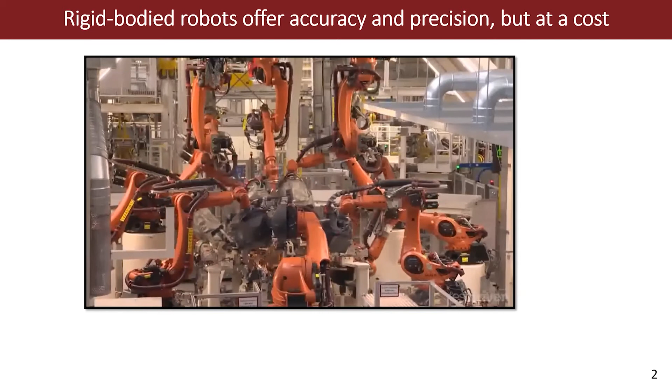So to start, I think I'll start with why should we care about soft robots? The type of robots that most people are most familiar with are rigid robots. They're made of stiff links and have strong and heavy motors. These types of robots are fast, accurate, precise, and have large force outputs, which is exactly what we want for industrial tasks like making cars.

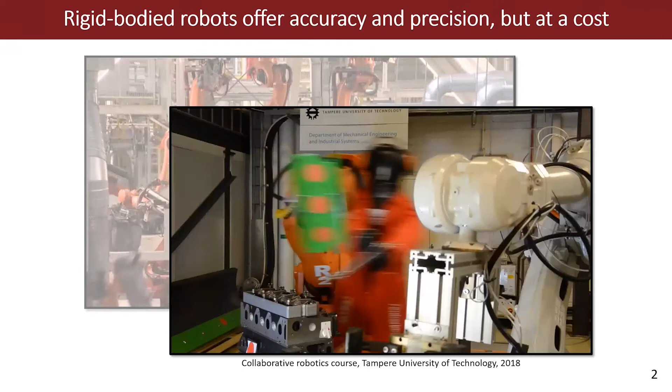But these same robots, if they perform the wrong behavior in the presence of humans, have the potential to cause serious injury or even death. As you can see from this simulation with the dummy, in real industrial settings, usually we keep robots and humans physically separated so that they don't interact at all.

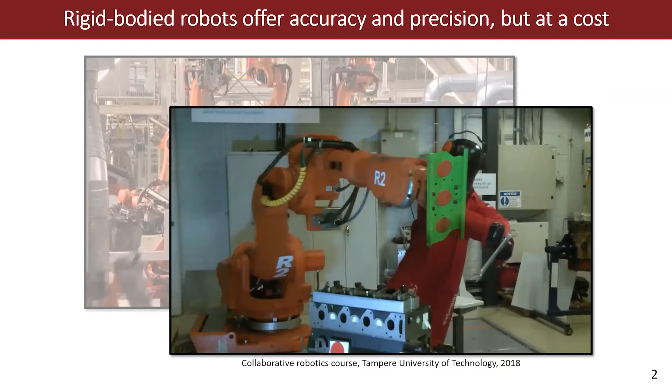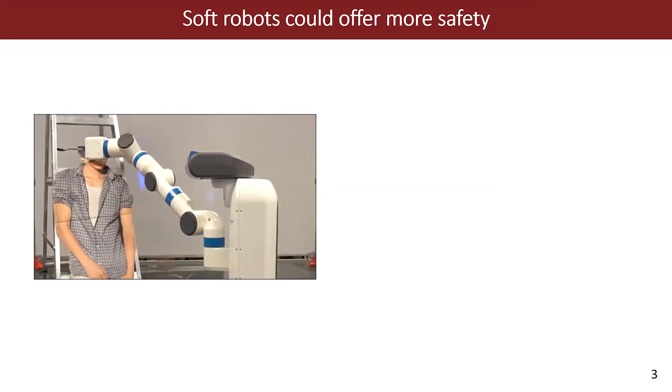But for robots to become more useful in our day-to-day lives, we need them to be able to safely interact with humans, because many of the tasks that we do on a day-to-day basis involve physical contact with humans. So take, for example, the task of feeding, where again if I have a rigid-bodied robot, it's not back drivable, and if it has the wrong behavior, it has the potential to cause injury.

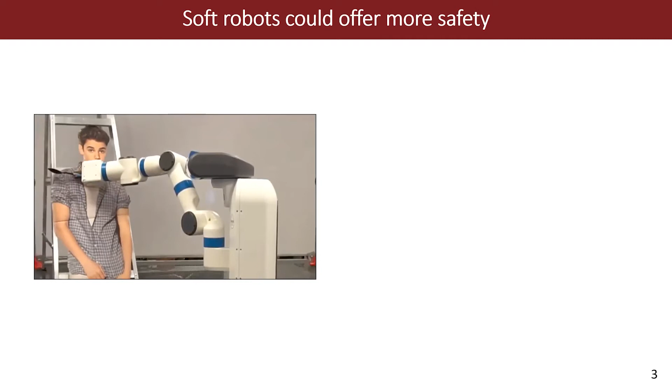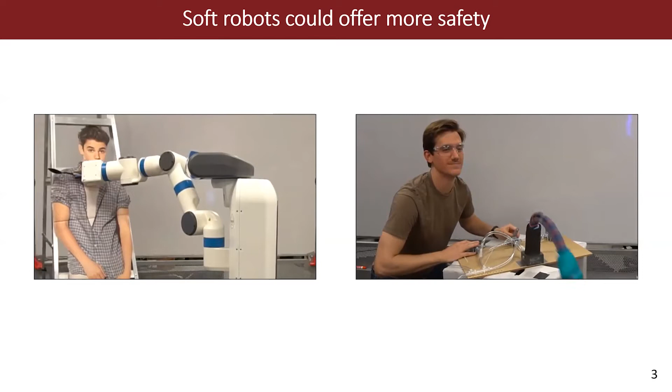So if we instead build our robots out of soft materials with inherent compliance, we can build systems that, even in the event of complete failure in terms of control, still offer some sort of inherent safety in interacting with humans. And so that's one of the main benefits of soft robotics, but it really only scratches the surface.

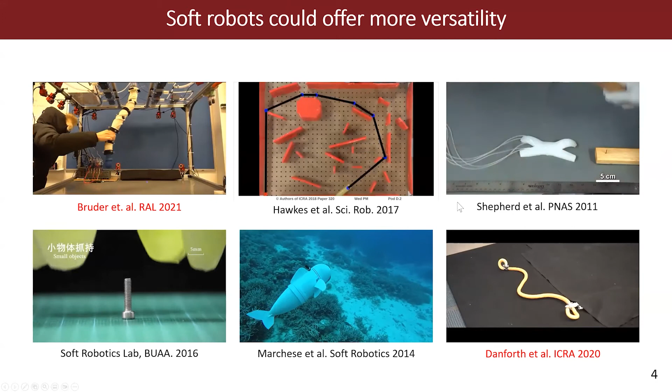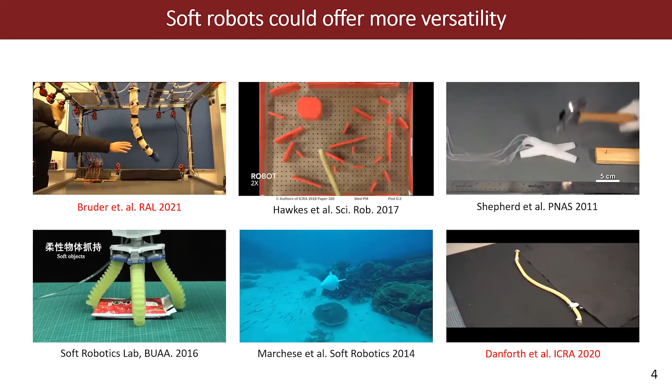In addition to being able to safely interact with humans, soft robots can also do things that would be really difficult to achieve with rigid-bodied robots, such as navigating through their environment through contact, by being able to absorb impacts without taking damage. They can conform their shape to grasp objects of various shapes and sizes without any sort of sophisticated control. And they can much better emulate the types of motions and morphologies that we see in natural systems like fish and snakes.

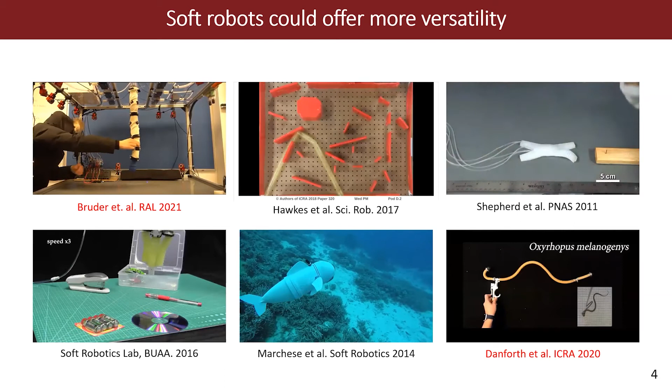So given all of these potential benefits, the overall goal of my research is to try to actualize soft robots that can safely perform real-world tasks, especially those in which safety and adaptability are just as important or more important than precision. Some examples of those types of tasks are assisting the elderly with things like feeding, bathing, getting dressed.

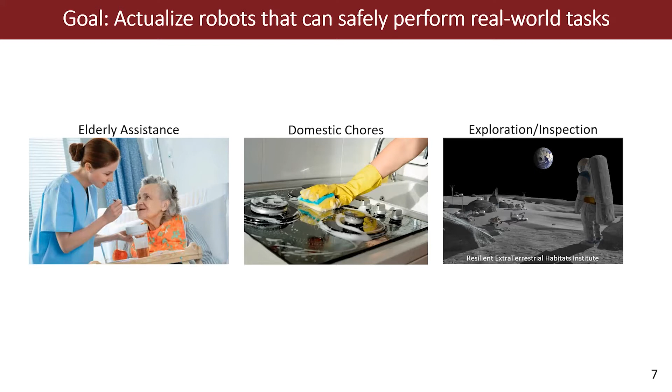It's a class of tasks where you need to be gentle just as much as you need to be precise. Domestic chores involve interacting in unstructured human environments and interacting with humans, as well as all sorts of different objects and geometries. And then even in exploration and inspection tasks, it's really nice to have robots that are able to adapt to unstructured and unpredictable terrain. So even in that domain, soft robots, I think, could be useful.

And so the approach that I take to trying to get soft robots towards these real world tasks is modeling, design, and control. So I focus on all three, and specifically the questions that I'm trying to answer are: in design, how do we build robots that are physically capable of performing these types of tasks? In modeling, the question is, how do we describe the robot behavior in useful ways that will allow us to actually control the robots and get them to perform the tasks that we want them to perform?

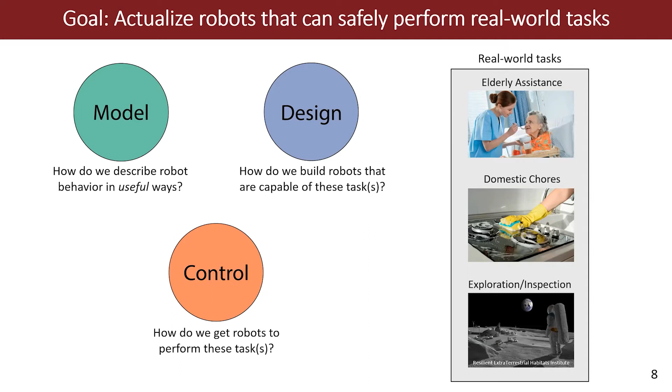So that's the overall goal, and these are the subdomains within. I try to take an integrated approach to modeling, design, and control, considering all three at once.

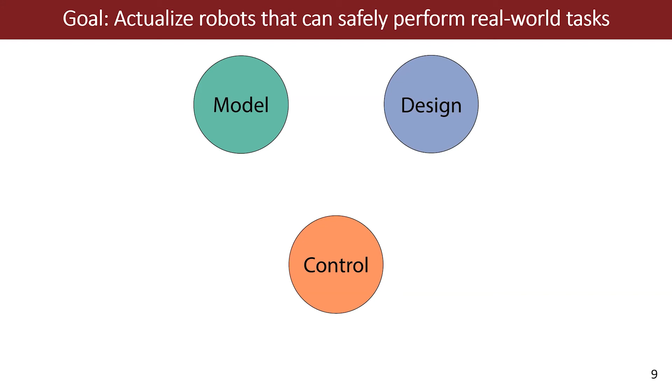In my past work, one approach I took was to develop a design-oriented, physics-based modeling approach for soft robots. This type of approach lets you consider many different soft robot designs before you actually construct them, and gives a principled way to do steady state control of soft robotic systems. But in order to build a physics-based model, you tend to have to make a lot of simplifying assumptions, so this modeling approach isn't useful for doing dynamical control of soft robotic systems.

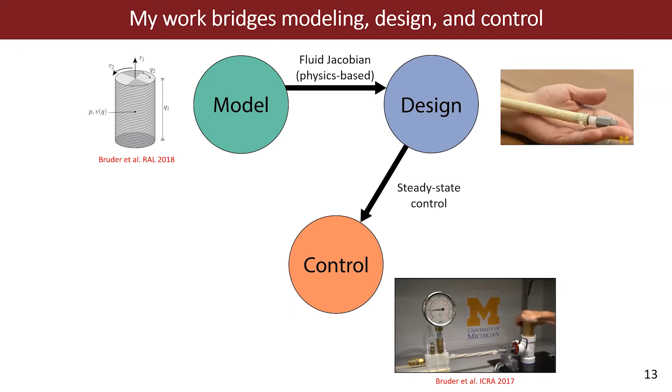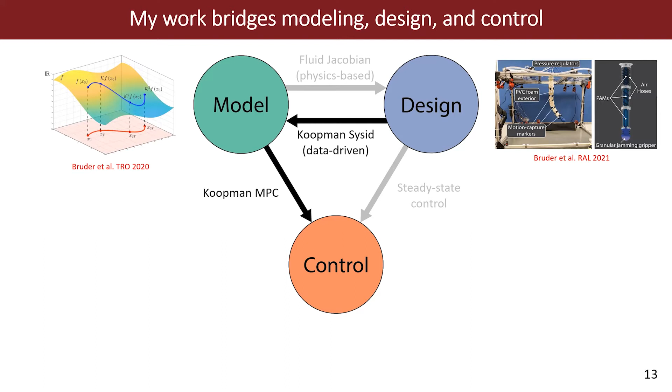So I'm not going to talk about this physics-based approach at all today. Instead, I'm going to talk about a second approach I developed, which is a control-oriented approach that's data-driven. This lets us take a real soft robotic system and learn a representation of its dynamics as a linear representation. With that linear representation of the robot's dynamics, we can apply linear optimal control algorithms to control these robots beyond the previous state of the art. So this is what I'll talk about today: this Koopman-based data-driven approach for soft robots and how it enables new behaviors we couldn't achieve before.

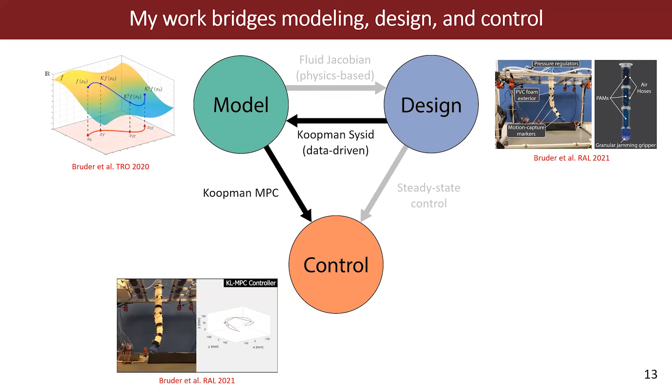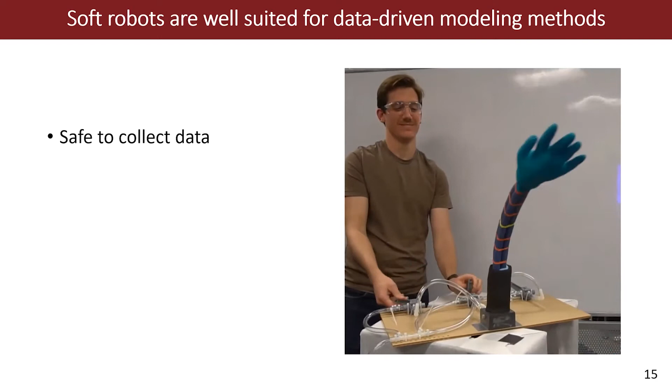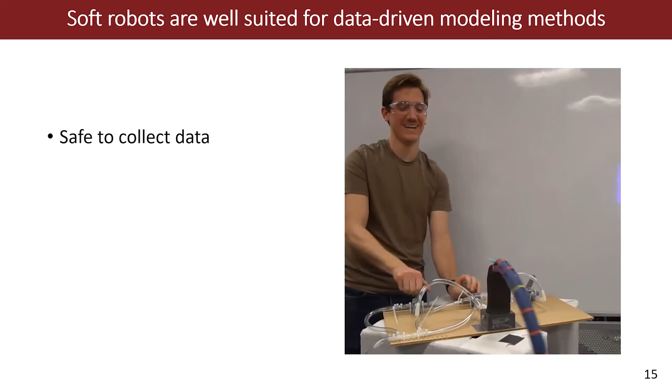So the first question might be, why is it a good idea to take a data-driven approach to modeling soft robots? It turns out soft robots are particularly amenable to data-driven methods for a few reasons. One, compared to rigid-bodied robots, it's really safe to collect data from them because, like in this video, I can command my robot under pretty much random control inputs and not worry about it damaging itself or its surroundings.

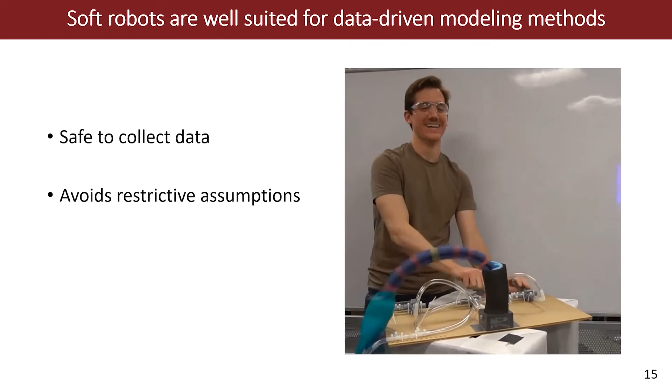The second reason is that by building models from data rather than from physics, we can avoid making the type of restrictive assumptions we typically have to make to keep those models tractable. Along with that comes the ability to account for fabrication defects explicitly in our models, which tend to play a pretty large role in these handmade soft robotic systems.

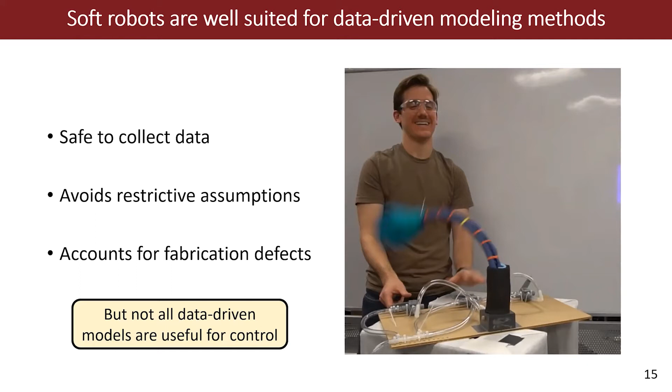But I said before that I'm trying to build a control-oriented modeling approach, and not all data-driven models will actually be useful for control. So we have to take a more particular approach to this. When I say a model is control-oriented, what do I mean? Well, in my mind, there are two things I really want in a model to help me do control.

The first, as with pretty much any model, is that I want it to accurately predict the behavior of my real system. But the second thing I'd like in my model is for it to be linear, because if I have a linear dynamical model, that means I can apply off-the-shelf, computationally efficient linear control techniques to make the system behave the way I want it to.

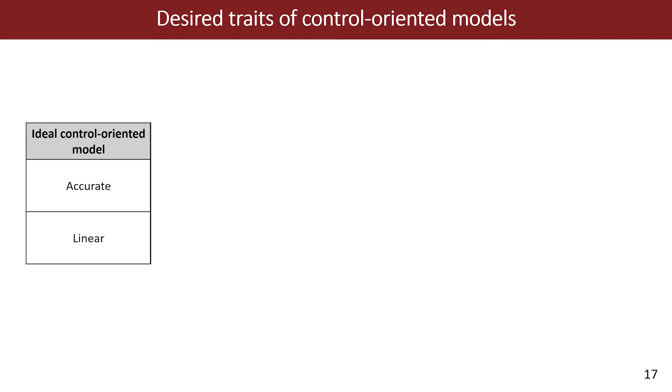So if I started from the framework of just wanting my model to be linear, I could do linear regression on collected data and identify a linear model using the subspace method, and I'd end up with a model that's linear. But if the underlying dynamics of that system are nonlinear, chances are my representation won't be very accurate.

So another approach I could take is to just focus on accuracy, training a neural network to get the best predictions possible for how this system will behave. In that case, I'll get something that's really accurate, but I won't have a linear representation of my dynamics. So there seems to be a trade-off between linearity and accuracy when we're trying to model nonlinear systems.

The really cool thing about the approach I'm about to talk about, based on the Koopman operator, is that it gives us a way to build dynamical system models that are accurate, but still give us a linear representation of our data. And it's not a local linearization, it's actually a global linear representation of the dynamical system.

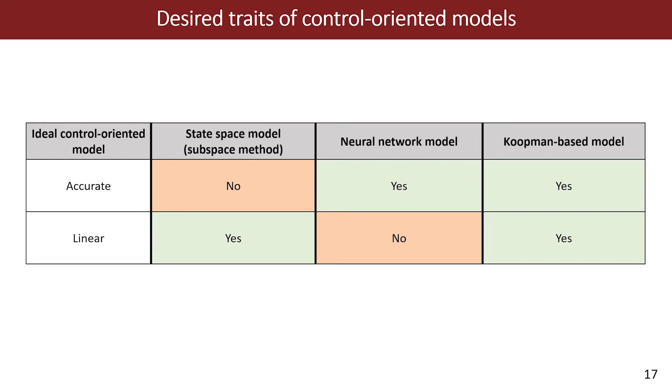So to understand the big idea behind this Koopman operator approach, I think it's useful to use an analogy from machine learning, specifically the task of classifying data points.

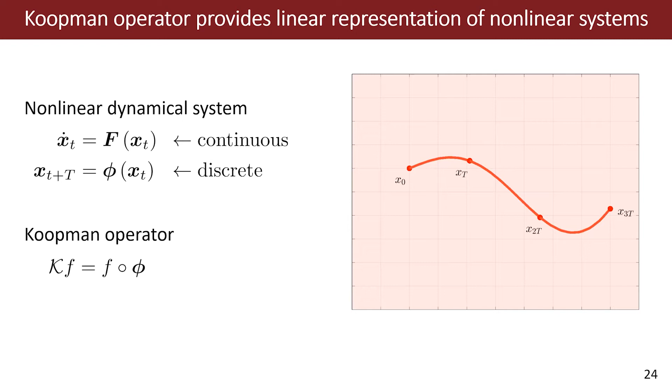And so now I introduce the Koopman operator, K. It's defined as the linear operator that composes scalar valued functions with the discrete flow map of my dynamical system. So what does this actually look like? If I define some real valued function over my state space, and I evaluate that function at the initial state, and then apply the Koopman operator to that function, what that gives me is the value of that function one time step later along the trajectory of the underlying nonlinear dynamical system.

And so you can see that if we repeatedly apply this linear operation, the Koopman operator, we can build up a trajectory of the function values through time. And from that, we can actually recover the future values of the state as well. So this gives us a way to linearly compute future values of the system.

May I ask a question here? This computation is not exact, right? The Koopman operator only gives you an approximation. In practice, that is true, because the Koopman operator in principle is an infinite dimensional operator. But in theory, it gives you the exact result. In theory, it's defined such that it satisfies this exactly. But when we use it in practice, it's always an approximation. You have to do some discretization somewhere. That's right, yep. I'll talk about that on the next slide.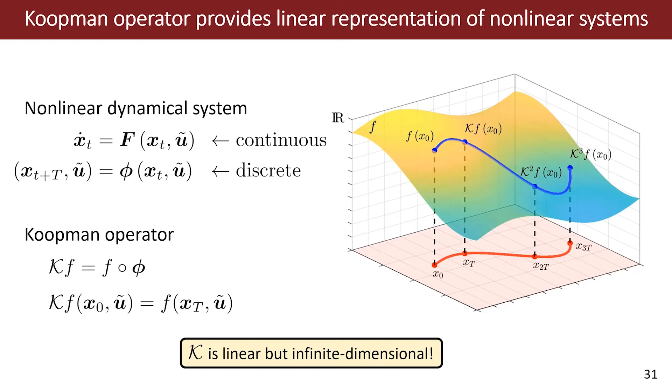So this speaks to Igor's question. You look at this and think, well, this is magic. If every nonlinear system can be linear, why is there any issues in control today? And that's because this isn't a magic bullet. The caveat is that even though the Koopman operator is linear, it's infinite dimensional because it's an operator that acts on functions, not finite dimensional vectors.

So when we want to use this Koopman-based linearization in practice, we always have to settle for an approximation restricted to some finite dimensional subspace. So what I do in practice is define some finite dimensional subspace by choosing a set of basis functions. These basis functions could be Fourier basis functions, Gaussian radial basis functions, or polynomials. It's up to the user, you can choose based on your system.

Once I've defined this subspace, I can represent functions within it as a finite dimensional vector, where each component of the vector, these C's here, are just the weights associated with each of the basis functions. Then likewise, my Koopman operator, which is an operator on functions, can now be represented as a finite dimensional n by n matrix.

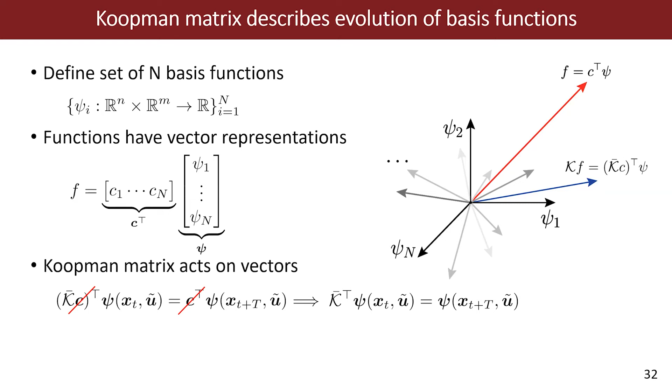So I can rewrite this definition from the previous slide in terms of this new matrix vector notation, where K bar is how I signify the Koopman matrix. And if we simplify this definition by canceling out C from both sides, what we get is basically this relationship, which says that if I take the transpose of this Koopman matrix and apply it to the vector of all basis functions, it'll advance that vector of basis functions forward in time one time step.

So essentially, the Koopman matrix acts as a discrete flow map on a quote unquote lifted state, which is an n-dimensional state comprised of all of my basis functions evaluated at the underlying state of the system.

So the question is, how do I actually identify a Koopman operator model for a real system and then use it for prediction and control? To show that, I'm going to walk through how we did this for a soft robotic system, which is a pneumatically controlled soft robot arm with a laser pointer on it, where the state of the system is the position of the laser pointer dot on a sheet mounted below it.

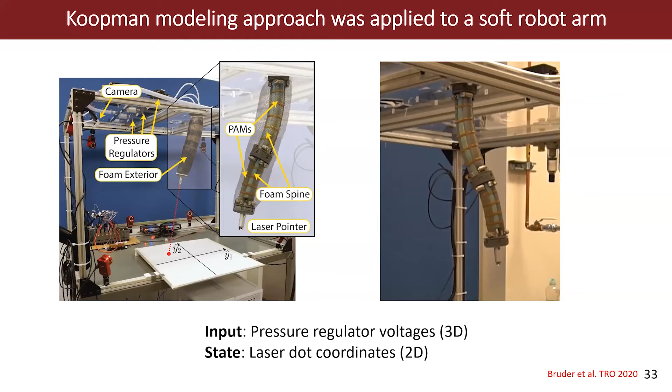So the first step in this process is to collect a bunch of data. It's a data-driven process. So we command the robot under randomized pressure inputs and measure the position of the laser dot.

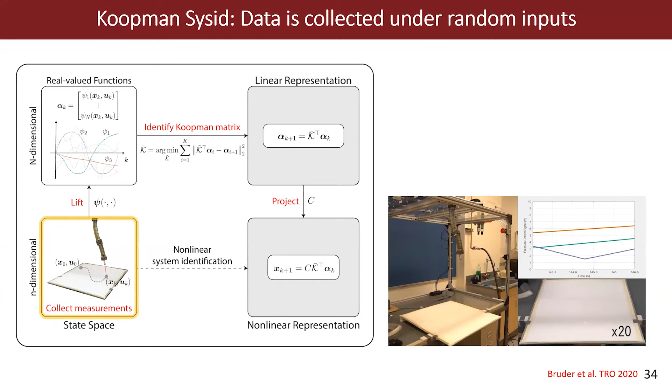Then we take all of those input-output data pairs and lift them into a higher dimensional space by evaluating a set of basis functions at each of those points. For this example, I use a set of basis functions that consists of monomials of the components of the state up to degree 2, which for shorthand I'm calling Z, as well as the input of the system appended to the end of that set of basis functions.

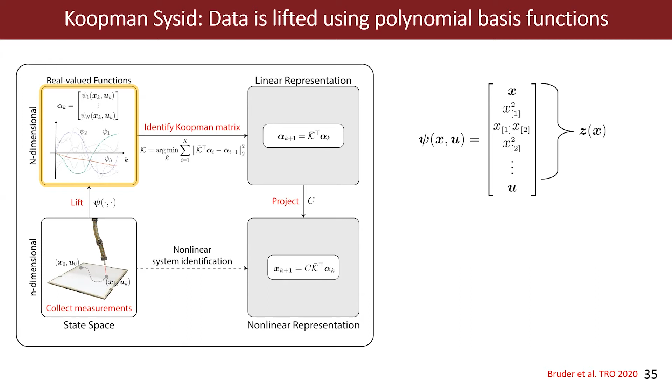And so now I have all my data in a higher dimensional space, and I can identify the Koopman matrix simply by doing linear regression on that lifted data. I find the matrix that best describes the one-step transition between consecutive lifted data points over all those data points.

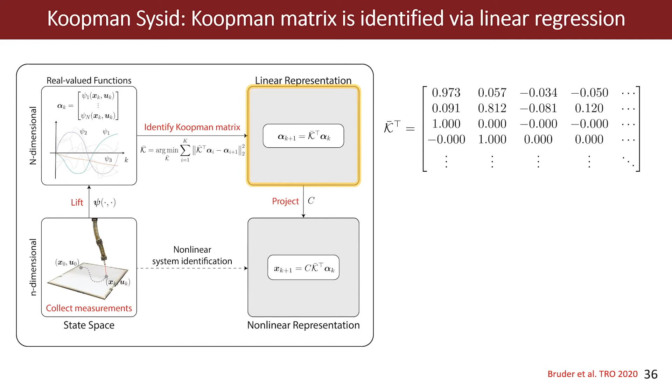And so now I have this linear representation of my system, and I can either decompose it to get a linear time invariant representation of my dynamics with respect to Z, which is the lifted state, or I can project back down into the original state space and recover a nonlinear model, which is basically just a weighted sum of basis functions that I chose.

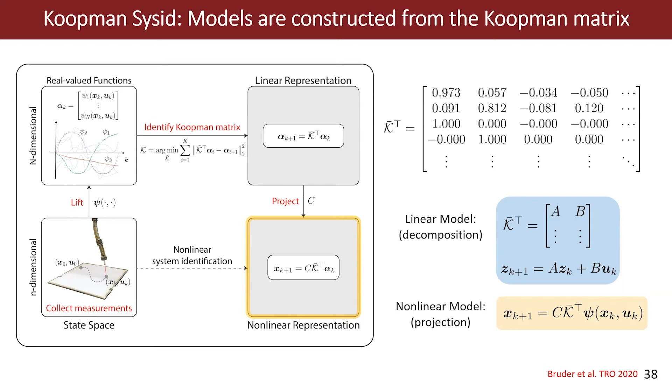But the really useful part of the Koopman operator comes when we think about control.

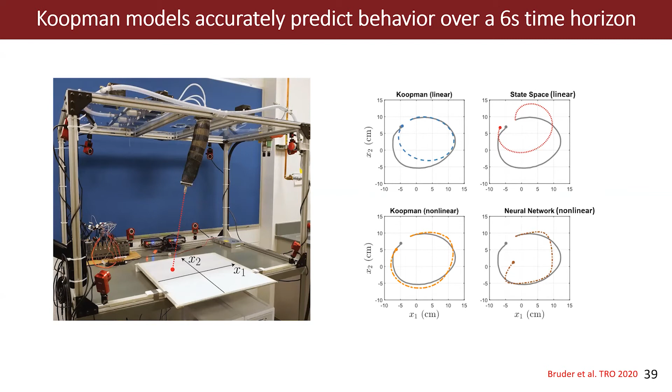Because now we have a linear representation of our dynamics, we can use that in an optimal control framework and really efficiently compute optimal inputs. So that's what we did. We take the Koopman model and incorporate it into a model predictive control framework.

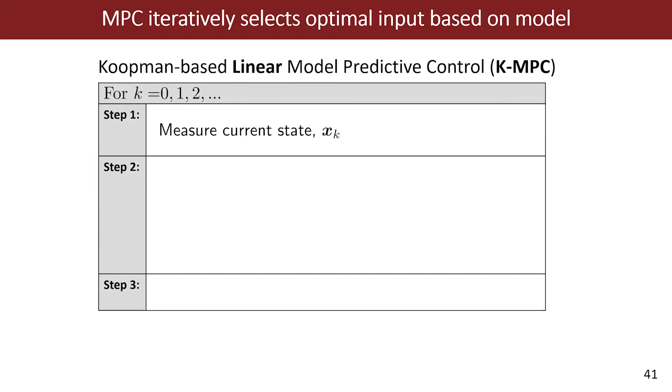For those unfamiliar with model predictive control, here's a quick overview of how it works. Basically, at every time step, we measure the current state of the system, and then we solve an optimization problem that tries to minimize some cost function, usually a deviation from some desired reference trajectory, over a sequence of lifted states and inputs. We make sure those sequences are subject to the constraints that they obey the linear model dynamics of our system, and they're consistent with the initial condition, which is the current measured state.

One other question with regard to your formulation: you use monomials as your basis functions. Does this make your Koopman operator related somehow to a Taylor series expansion for multivariate functions?

I didn't explicitly choose the basis functions to give me a Taylor series representation, where you want to include as many derivatives of your dynamics as possible. But essentially, that is what I assume is being built through this linear regression process. So basically, when you choose them as monomials, you end up with a Taylor series approximation. Is that accurate to say? I think it's accurate to say.

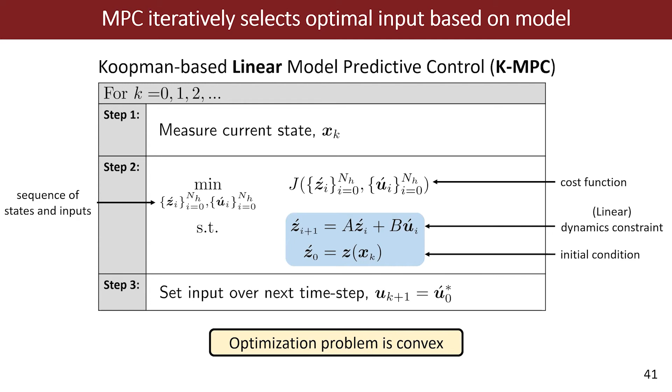So how does the Koopman operator help us here? Well, because the Koopman operator gives us this linear representation of our dynamics, that makes this optimization problem convex. That means we have a global convergence guarantee, and we have efficient methods for solving that optimization problem.

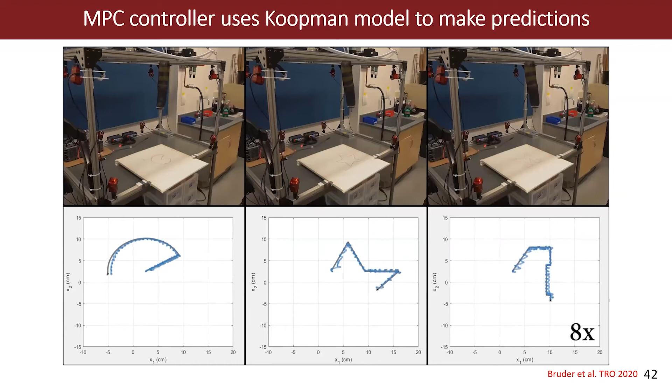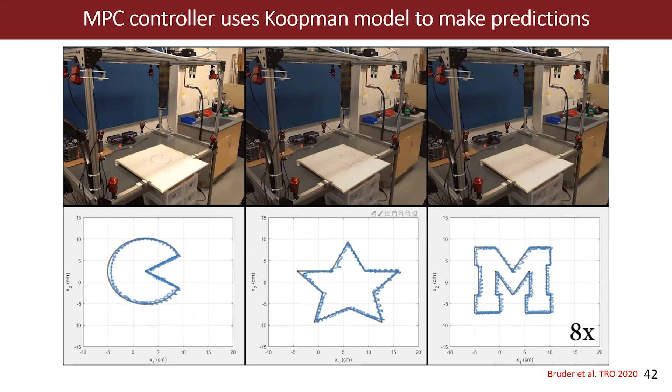Here we have used a model predictive controller running at about 40 hertz on the laser pointer system. This lets us do arbitrary trajectory following with the laser dot. Shown here are a few examples of different trajectories that were not part of the training data set at all. So it's not like we trained it to explicitly draw a star or a circle — this is just having it do MPC to follow these reference trajectories.

So we get decent following, and if we compare that to the results when we use a model predictive controller built on a linear model from the unlifted data — the linear model that wasn't lifted into the Koopman space — we see the Koopman model does much better. In fact, it's roughly four times more accurate and more precise than the non-lifted MPC controller.

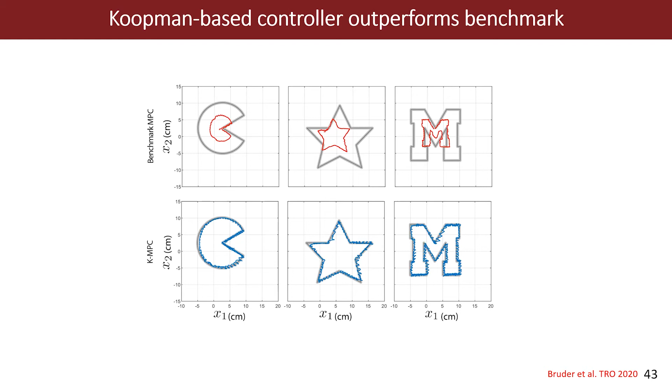We were pretty excited about those results, and I wanted to see if that works for this simplified laser robot, but will it work for a more complicated robot that can do more interesting things? So I built this robot arm that has 3 bending sections and an end effector with a gripper.

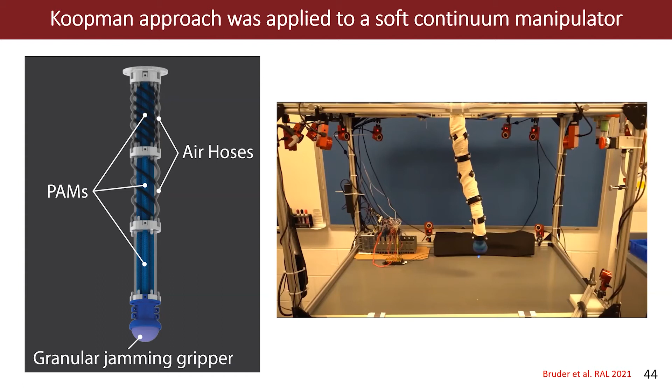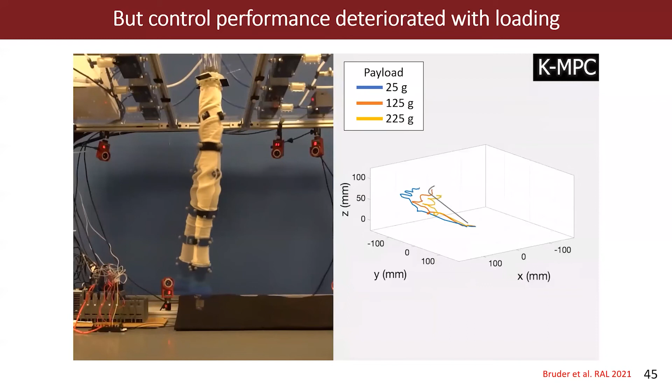We did the same process where we collected data, learned the dynamics, and then did control with it. It was still able to do some trajectory following with the end effector. But when we changed the payload, the performance varied a lot. Shown here are 3 different trajectories all superimposed, with a different payload at the end effector, and this plot shows the path of the end effector.

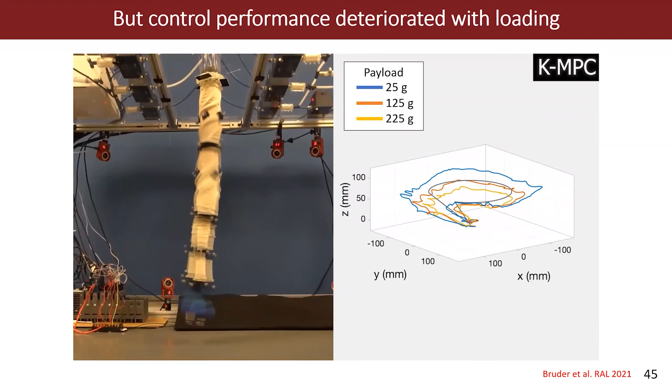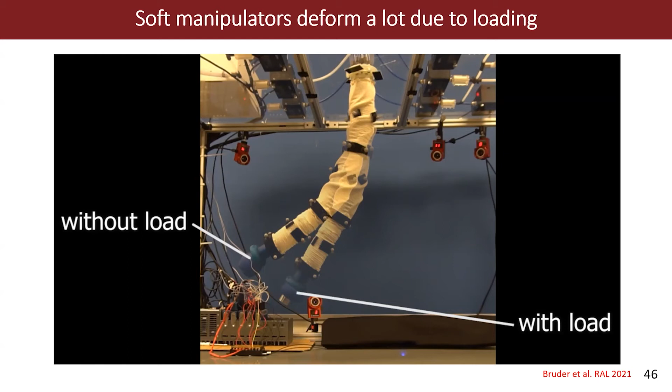It's trying to follow the gray reference trajectory. But as you can see, for different payloads, there's a lot of overshoot or undershoot depending on the payload at the end effector. This isn't really that surprising when we think about it, because we know this is a soft system, there's compliance, and compliant systems deform quite a lot due to loading. But we need some way to explicitly account for the effect of loading in the model, otherwise our controller just won't be able to make up for it.

We can actually do that pretty easily using this data-driven framework. All we need to do is collect data of the load at the end effector, which we're calling W here, and then lift that so we have it explicitly baked into our basis function. Then when we learn a linear representation, we have a model that takes into account the effect of loading on the dynamics of the system.

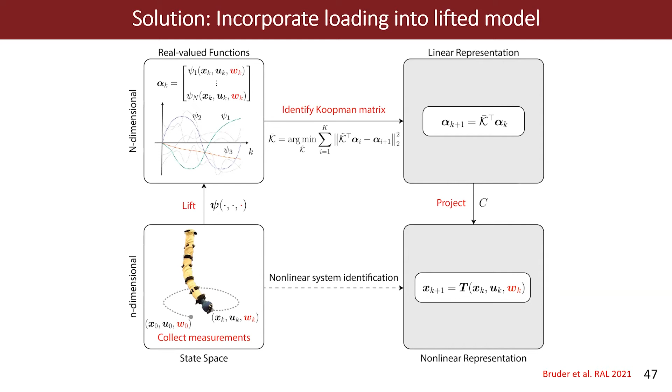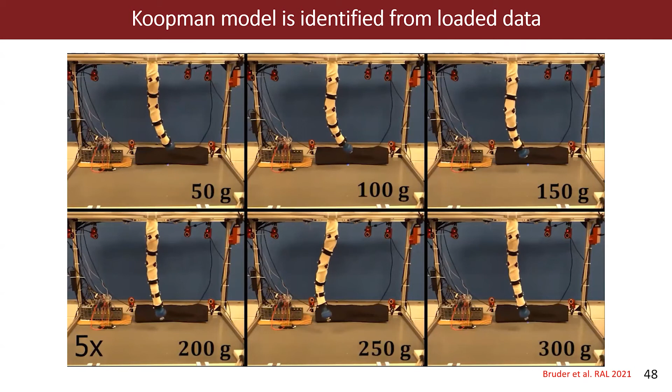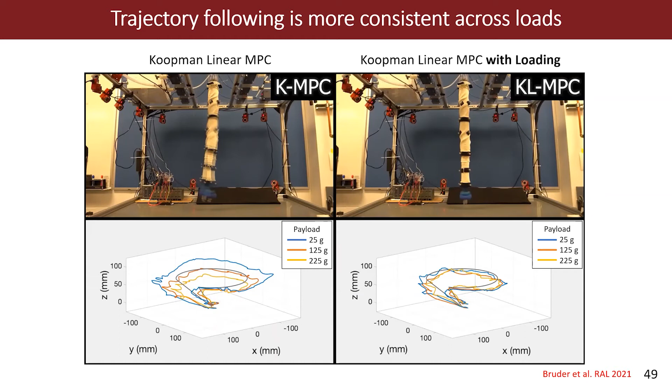That was nice, but it actually only solved half the problem, because this controller assumes that the payload is known at the end effector. In practice, for most tasks, the payload will be unknown. So here's another point where the linearity of our model is helpful, because now we need some way of estimating the payload online.

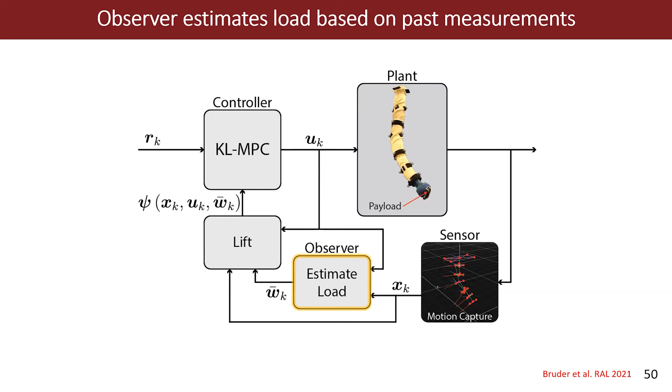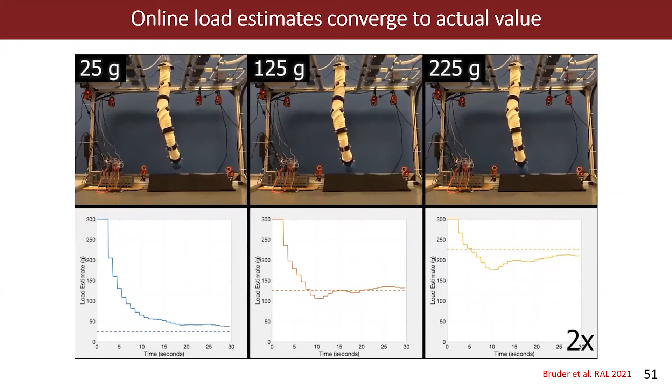So once we had this loaded model plus this way of doing online observation, we could finally use a soft robot to do the type of pick and place task that could get close to being useful for real world applications. What we did is give the robot an object of unknown mass, and then it moves that object around while updating its estimate for the payload or the mass of that object.

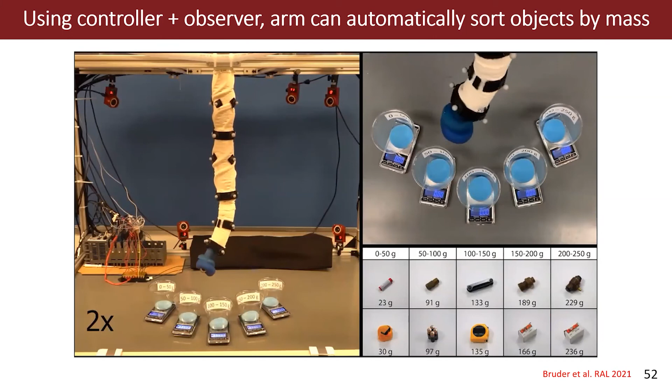Based on its estimate, it moves and drops that object in one of the cups corresponding to that payload. For a set of 10 random objects in the lab, it was successfully able to sort all of them by their mass.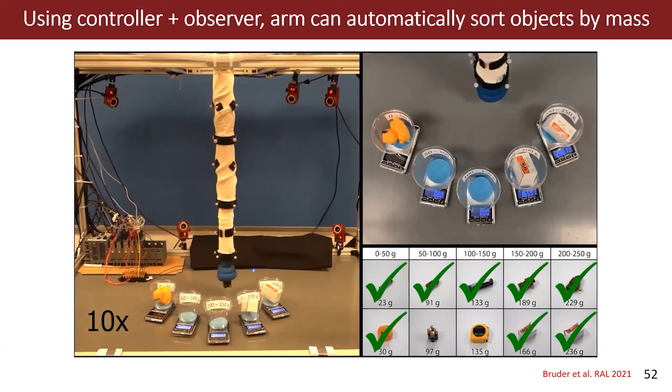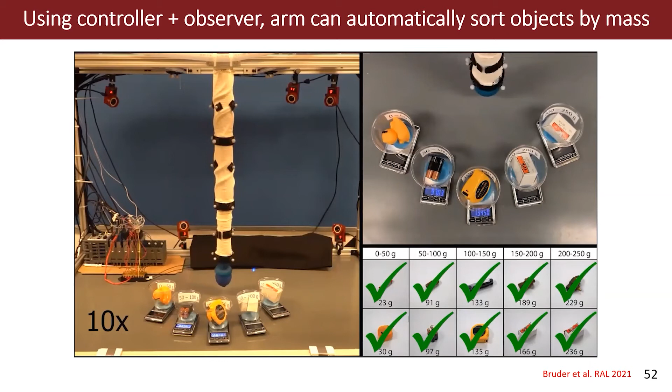In order to do this successfully, the robot needed to estimate the payload to within 50 grams of the real mass, as well as control the end effector position to within a 4 centimeter range, which is the radius of this cup. At the time we did this, as far as I know, this was the first time showing a fully soft robot arm doing this type of autonomous pick and place task. So the techniques for modeling and control that we applied actually enabled new behaviors that weren't possible before.

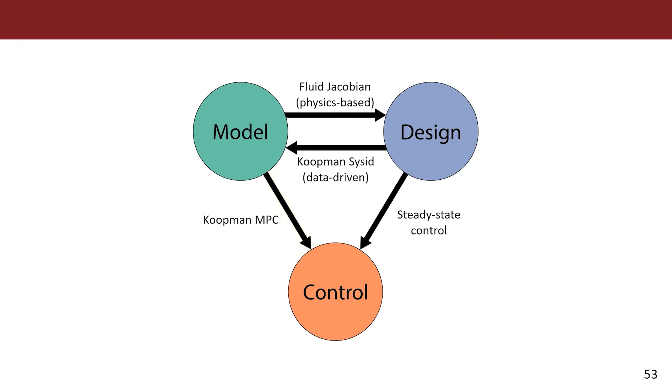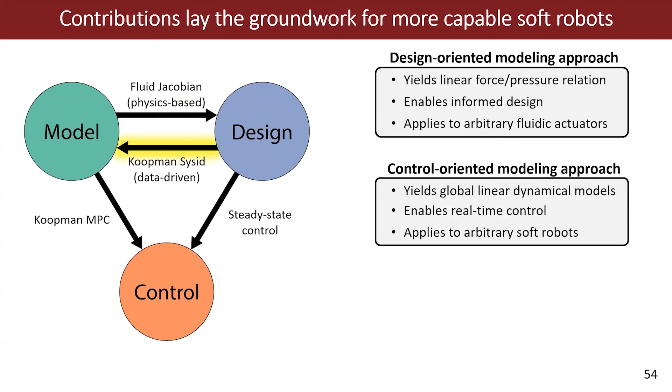To summarize, today I mainly talked about the Koopman operator modeling and control code for soft robots. But in other of my past work, I've worked on design-oriented modeling approaches, as well as what we just saw, control-oriented modeling approaches. Both of these are used to demonstrate model-based control of real soft robotic systems. Taken all together, I think these contributions constitute the beginnings of a framework for soft robot modeling, design, and control that will eventually lead to much more capable soft robots. We're not quite at the point where we can do the type of elderly assistance and exploration things that I mentioned at the beginning of the talk, but I think this is a step toward that.

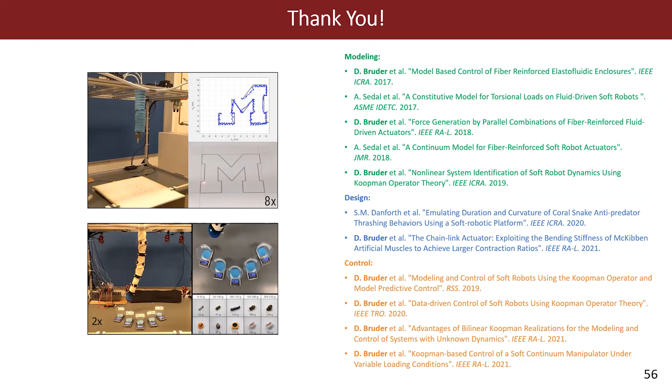Yeah, that was the main motivation for us in using it: getting a linear representation of the dynamics. And of course, it's all still an approximation. There are some things you can prove, like convergence to the true dynamics as you increase the number of basis functions, but those only show that for the non-controlled systems case. Whenever we introduce this control input, we're doing a little bit of crossing our fingers and hoping that it works out great. But that is the main motivation, trying to leverage that trade-off between increasing the dimension but getting something that's linear out of it that we can use for control. It's all about getting it into a format that's better for control.

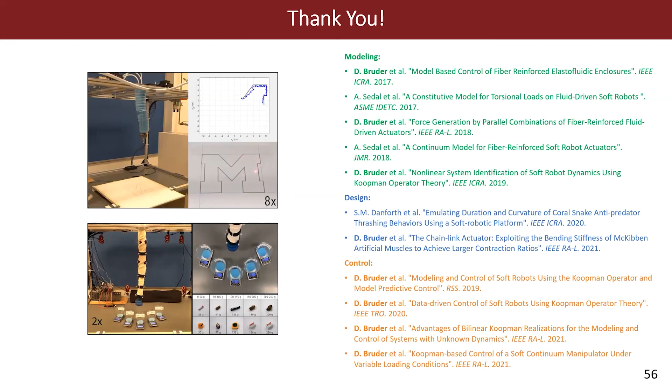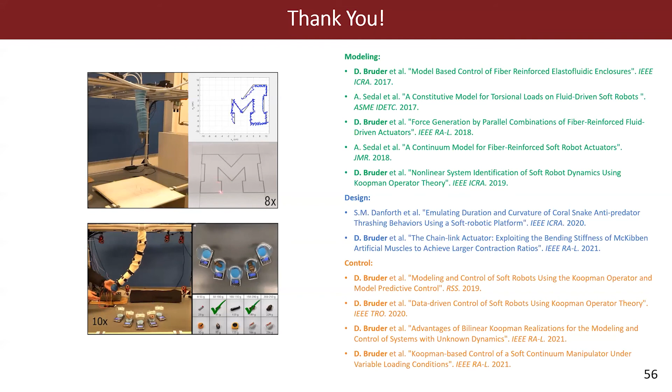Maybe one more question about the basis functions and the choice of the basis functions. Do you have, for what you want to do for controls, a limitation on how to choose these basis functions? For example, you chose monomials. Would it be equally possible to choose for basis functions some neural network and jointly learn the basis function and the Koopman matrix, which would maybe allow you to model more precise dynamics than just a few monomials will do? Is this something that people do, or is there some constraint not allowing it?

Yeah, no, it's a great question. You can really choose the basis functions pretty much arbitrarily. You're choosing a set of nonlinear functions arbitrarily, and you still get the linearity even if you choose really weird basis functions. That process you described, of doing some sort of joint training to find the best set of basis functions while finding the Koopman operator that corresponds to those, has actually been done by a few groups. There's a big paper out of Washington, I think the first author was Bethany Lusch, with Steve Brunton and Nathan Kutz. They did a paper on using neural nets to find good basis functions. I think Robert Kashman's group has also done some work trying to find the right basis functions in a way that you can say something about the convergence. So the choice of basis functions is a very active research topic, and people are approaching it in different ways to try to find the best choice, because it all hinges on that. As soon as you limit yourself to a finite dimensional representation, the choice of basis functions matters a lot, and you'll get very different results depending on what you choose and how good they are at representing the actual dynamics of the system. So you have good instincts, you came up with the exact solution that others have done.

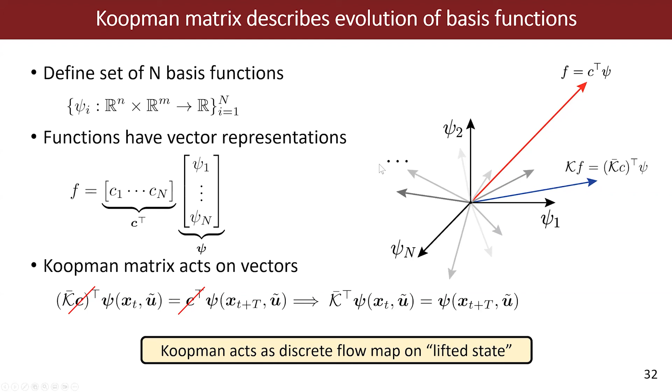So the Koopman operator looks to me a bit like the kernel method in machine learning, like regression or classification. Can you comment on how we compare kernel methods and the Koopman operator? And specifically, is there any kernel trick we can use for the Koopman operator in this field, like computing the kernel matrix instead of the explicit Koopman matrix? Which is the key here—is there such a case? Yeah, that's a great question.

Yeah, it's very similar to, it really is the same idea as kernel methods, where you have a latent space, a representation that's nicer than the regular state space. But you bring up a good point—in kernel methods we have the kernel trick, which basically lets us, instead of having to explicitly lift into the infinite dimensional latent space, know the inner product. In this work, we actually are explicitly lifting up into the higher dimensional space, and we have to use this finite dimensional restriction because we don't have that same kernel trick that lets us stay in the space we like but still get the benefits of that latent space representation.

As far as I know, that is a sort of limitation, and we don't have the equivalent of a kernel trick. It's something I've spent some time thinking about, and I think others have too, so maybe someone will come up with a way of giving some sort of benefit similar to that trick. But as far as I know, to do this with dynamical systems, we still have to lift into the higher dimensional space and actually do the computation up there.